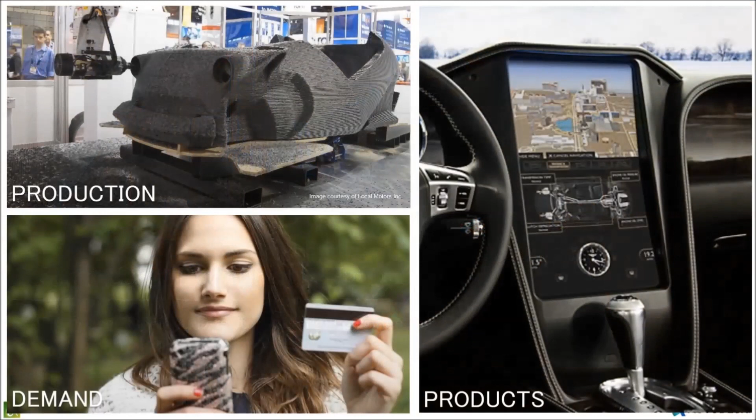With world-leading research and development around the globe, today we will talk about new production methods, demand, and products.

The world is changing, and production is changing. I am now getting older, and I have seen some of this change. Using additive manufacture for making automobiles, to me, is fantastic.

I also have three teenage children, and I can see the way they demand products. They want things immediately with their phones, purchasing within seconds, not minutes, not hours.

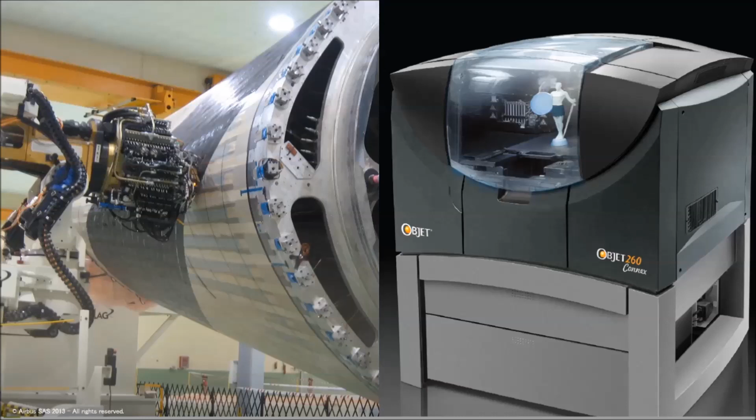Manufacturing is changing. Here we can see the fuselage of an Airbus being manufactured from continuous carbon fiber. This type of manufacture is totally transforming the way we make parts, making them lighter and stronger.

3D printing is becoming part of everyday life, where you can design a part and have it in your hands within a few hours. So the world is changing.

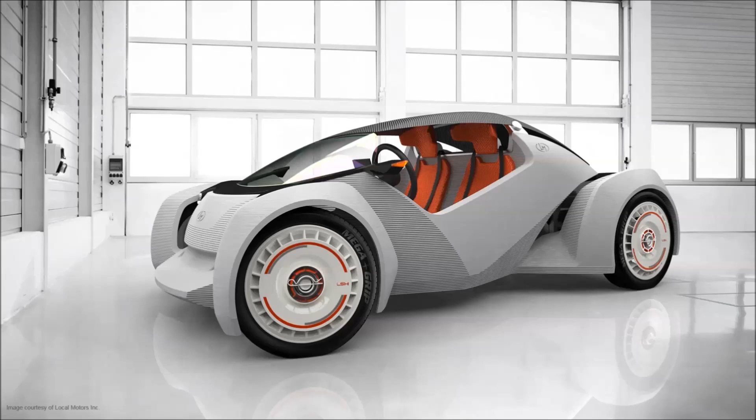For example, this is the world's first 3D printed vehicle. This was designed by people all around the world.

It can be customized for the individual and manufactured locally. The idea of car dealerships having to keep many parts in stock will soon change — you'll be able to manufacture the part for your vehicle locally.

One important aspect is the material used. The material may depend on your local geography — maybe you're in a very hot or very cold climate. So the material can be specialized for your environment. Presently, automotive manufacturers have to make vehicles that work in places like the Antarctic and also very hot places like the Bahamas.

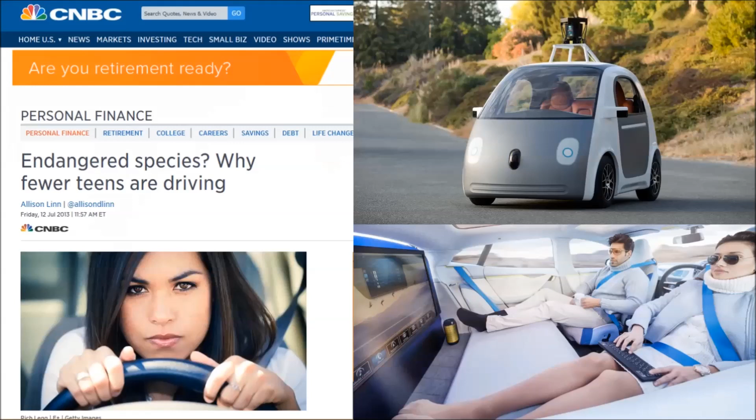Here's an interesting concept — we all have our driving licenses, but we may soon be the last generation to have them.

Like when we go on the Shinkansen, we have a coffee, sleep and relax — local transport in automobiles will go this way too. You'll be in your automobile and maybe go to sleep, and it will be a far safer future.

Thankfully we have technology. It is here, it is evolving, and it is part of our everyday life.

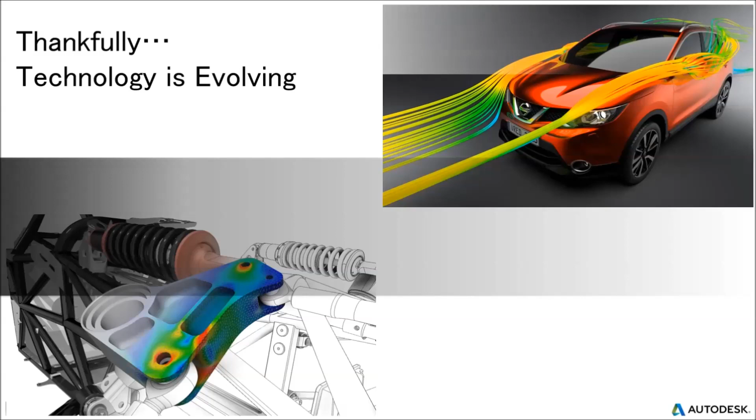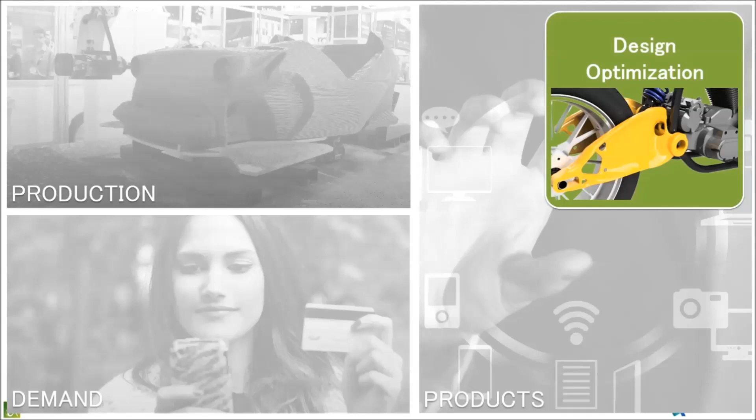This is how we will transform simulation for the future. So we will talk about production, demand, and products — one very exciting part of simulation is design optimization.

This afternoon my colleague Kanji-san will present this in more detail. I guarantee this will astound you in terms of technology.

Advanced materials and manufacturing — composite materials can now give far superior properties than metals. This is something my father would never have believed.

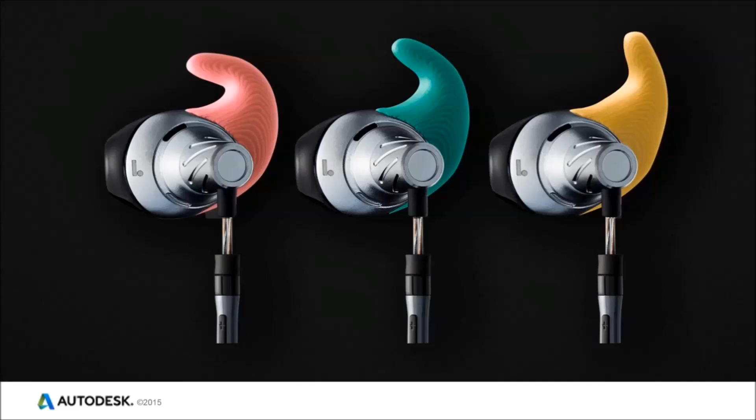And we'll also talk about smart machines. So, advanced materials and manufacturing — the promise is how this will change our future.

This is a fantastic example of how design, technology and demand all combine together. Everybody has earplugs, and whenever you're running, they always fall out. So now, with your mobile phone, you can take photos of your ears.

Within a few days, you can have custom earplugs made for your ears. And this will also stop my children from taking my earplugs.

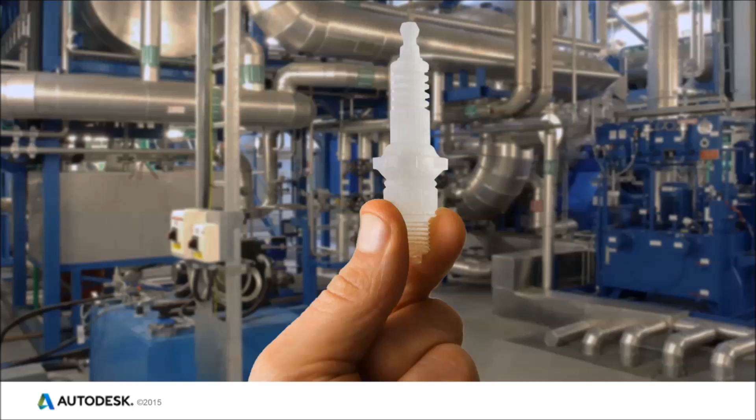Technology is changing traditional manufacturing processes. Think of devices like spark plugs for engines - we can now manufacture these in different ways. 3D printing used to be seen as just for small components, but now it's used in industry every day.

I really love this slide because it shows how engineering is becoming closer to nature. My father was a design engineer many years ago, but he designed in very rigid, formal ways.

But think about our bones - they are light and hollow, yet designed perfectly for their function. They are strong and dense where they experience high stress.

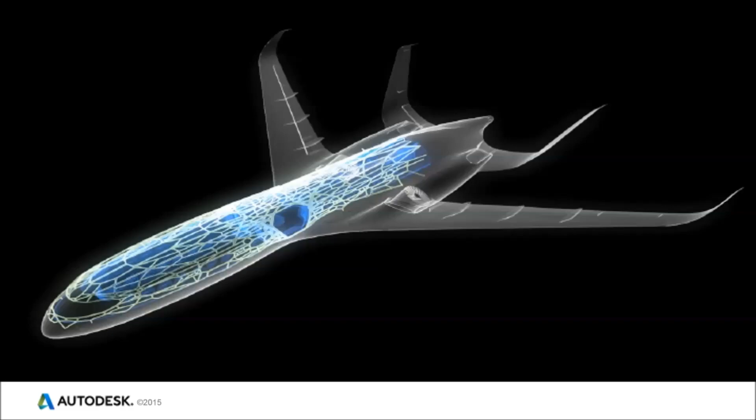With new technology, we can make parts and save weight, so we can make cars more fuel efficient. It's not about how fast your car can go, but how economical it is.

My Japanese car in Australia has the same fuel efficiency as my motorbike when I was a young man. It was also a Japanese motorcycle and I loved it.

If my wife will let me, I'll buy a new one. I fear she will not.

With new processes, we can make designs freer, more durable, and more efficient.

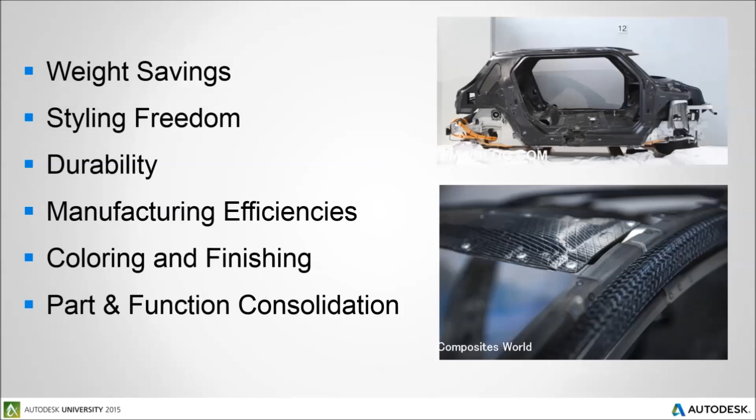So we've talked about the reality of advanced materials and manufacturing.

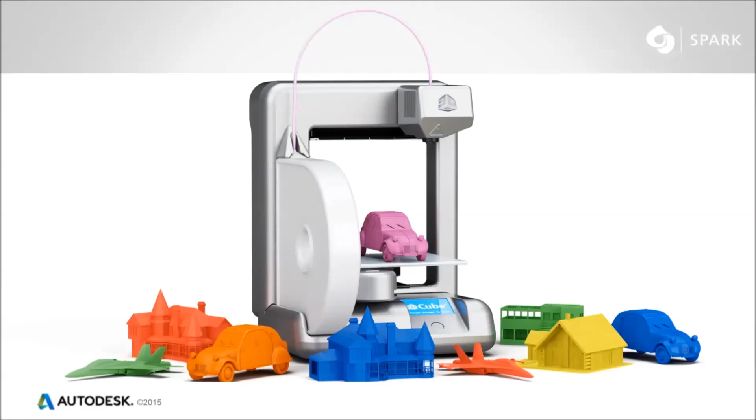This slide looks very simple - 3D printing and all these beautiful components manufactured by additive manufacturing. My children want an additive manufacturing device, a 3D printer for home.

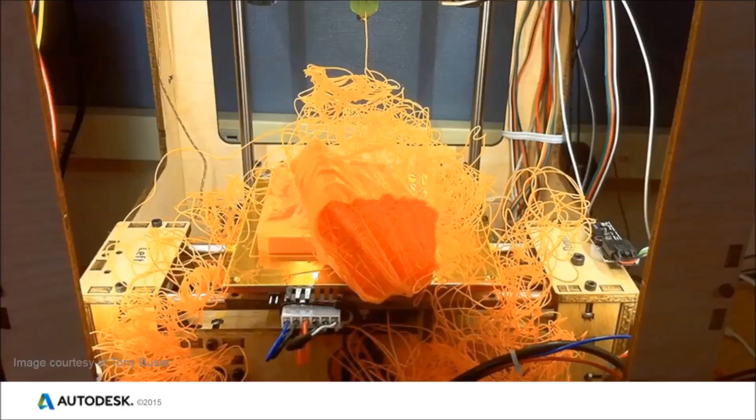But here's the reality - this is spaghetti. 3D printing also needs expertise.

I introduced a MakerBot into our facility in Australia maybe 3 years ago, and we happily made spaghetti for many weeks.

With materials, we can combine the advantage of long fiber composites with traditional injection molding. Think of the carbon fiber used in Formula One combined with injection molding, adding aesthetics and functionality. My father would be very surprised to see this.

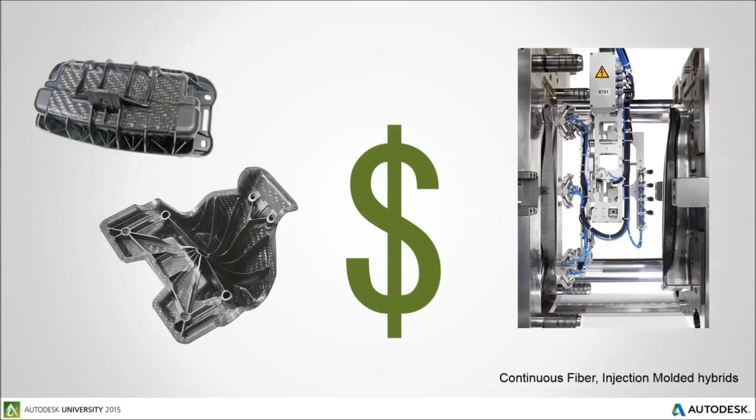So let's talk about how simulation can help in this process. Simulation can optimize the design upfront, and we can explore composite material options digitally.

Autodesk has much technology used in the movie industry, so our simulations can look more real than real. When evaluating product design and how light affects the part, it's unbelievable.

But life is not easy, and over my 20+ years with Moldflow, I've seen how technology has changed. Customers are always wanting tighter tolerances, more and more tolerances.

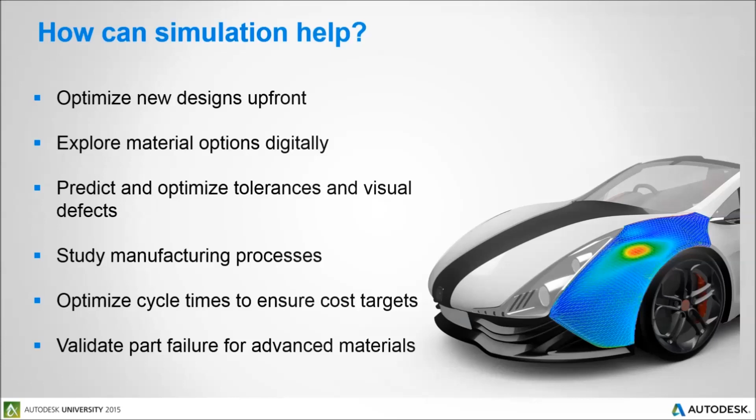So we talked about spaghetti - here's an example of how Autodesk takes spaghetti into something more beautiful, like tempura, Japanese food.

Because you can simulate the 3D printing before you make it, and we now have the tools for this within Autodesk - also algorithms for how to support the components while they're being manufactured.

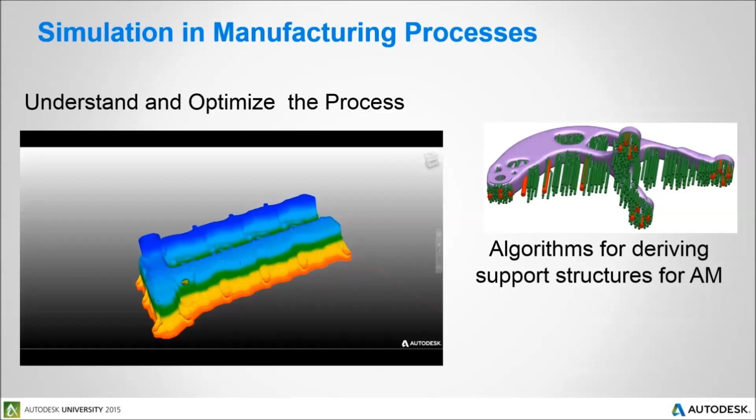Sometimes with additive manufacturing, you can't even see the part because of all the supports, and you wonder where it is. More supports means longer cycle times and more material, and for metal additive manufacturing processes, this can be very expensive.

So, simulation for optimizing performance - we mentioned visualization. Here's an example of a classical Moldflow analysis showing a defect. This is what we accept now, but this is what we also have now - this is totally fantastic. This is a simulation, not a photograph.

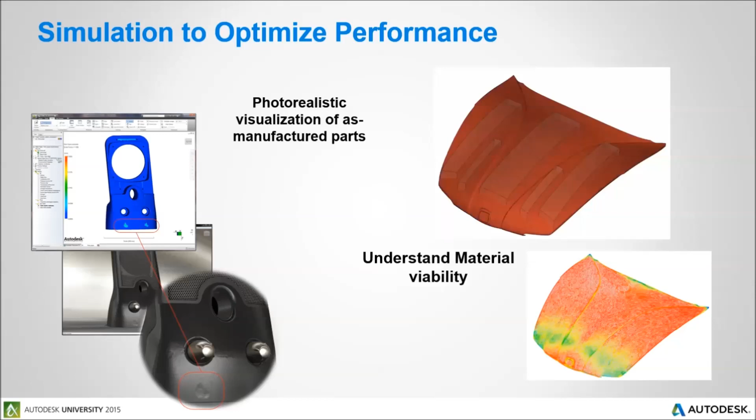Now we'll talk about smart machines and how these will transform and are transforming the world.

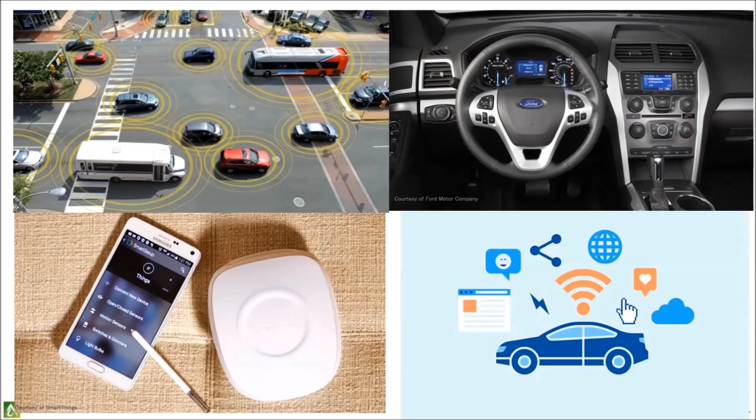The most obvious example is automobiles. And not us talking to each other on a phone, but the vehicles talking to each other and also talking to the manufacturer.

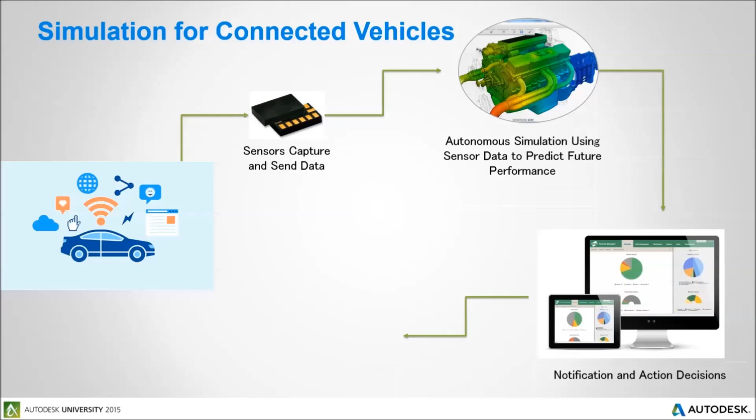Or even better, the vehicle making changes itself to help fix problems, with data going back to the manufacturer and a recommended service.

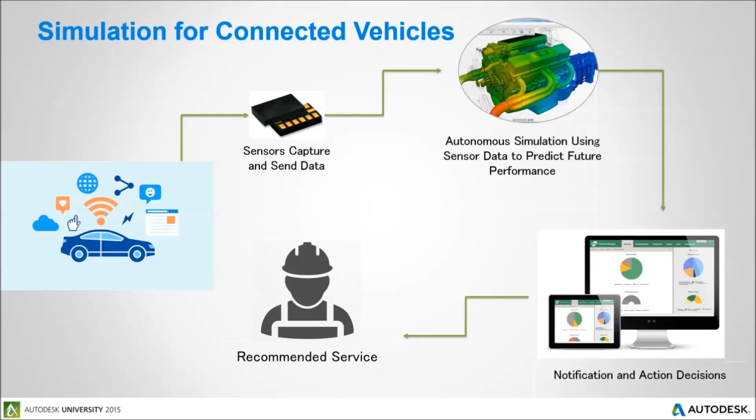So this will transform our lives. And here's a real life example: the Tesla automobile, an electric vehicle connected to the internet.

If there's a recall on a vehicle because of a safety issue, this is inconvenient, it's frustrating, it's annoying, and it could be dangerous. So here is a vehicle which connects to the internet every day.

Every day, Tesla knows how your car is performing, and every day updates can come onto the vehicle for safety. A real example was where the ride height of the vehicle was changed overnight because of a potential safety issue.

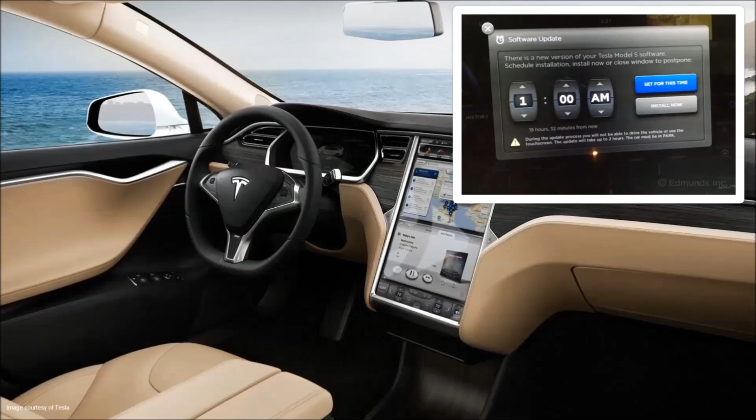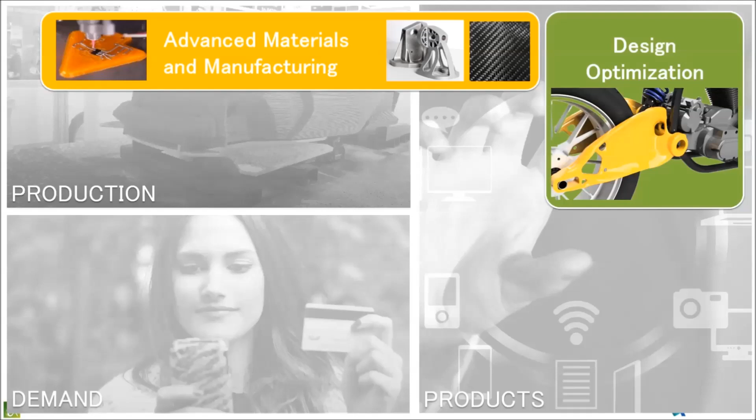So we talked about design optimization, and Kenji-san will talk about this further. We talked about advanced materials, manufacturing, and also smart machines.

These are all areas Autodesk is investing in. I am personally very proud to be part of Autodesk in this change.

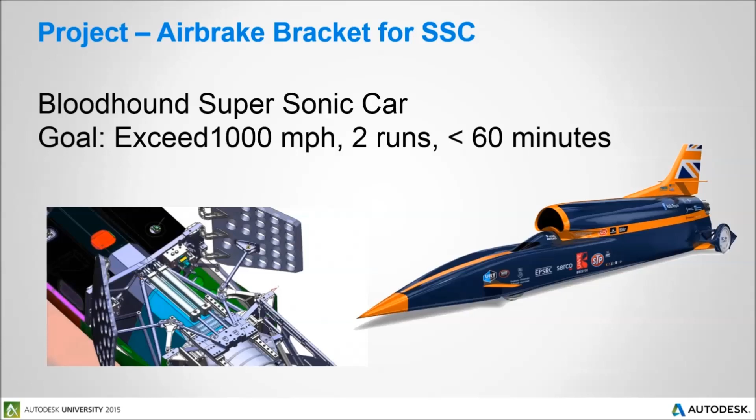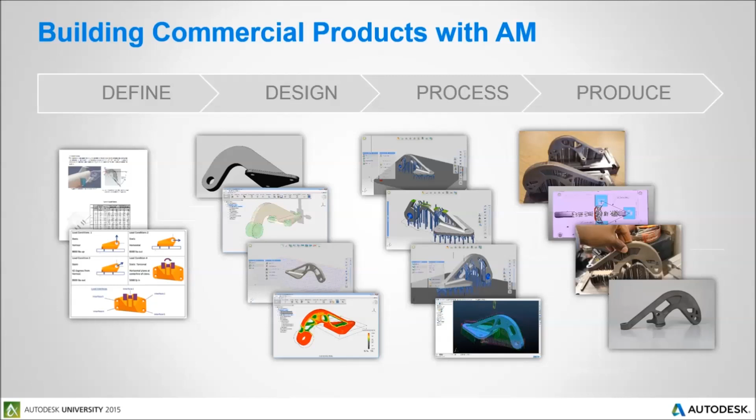So we talked about topology optimization, and you look at this part here. Traditionally, you would make this solid. This type of technology will change the way you design parts.

Where you can define the structural requirements of the part, and you can achieve those structural specifications by using significantly less material. So you make the parts lighter and you use less material. It sounds very simple, but this is what we are doing now.

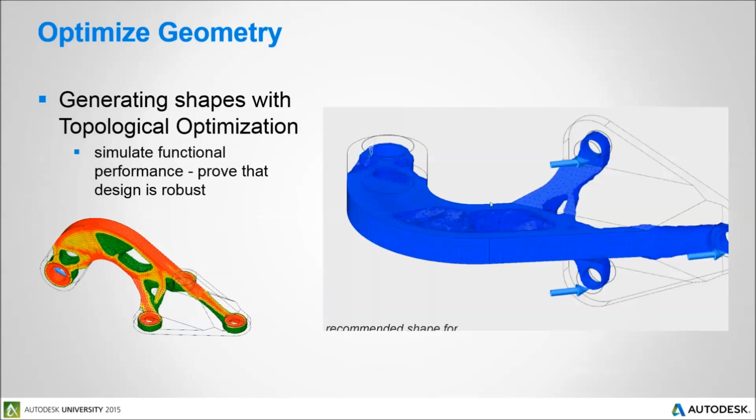For additive manufacturing, to avoid one of the biggest problems, which is meshing and repairing of CAD, Autodesk has tools for you to use to take CAD, maybe non-ideal CAD, and mesh it and repair it in one easy step.

For example, sometimes it can take hours, weeks, and months to load the CAD into these packages so that they can be manufactured, because there are slight gaps and holes and it's not perfect CAD. So we have tools now so that within seconds you can repair and go into the printing process. And for large components, you have to analyze the supports where the highest load is.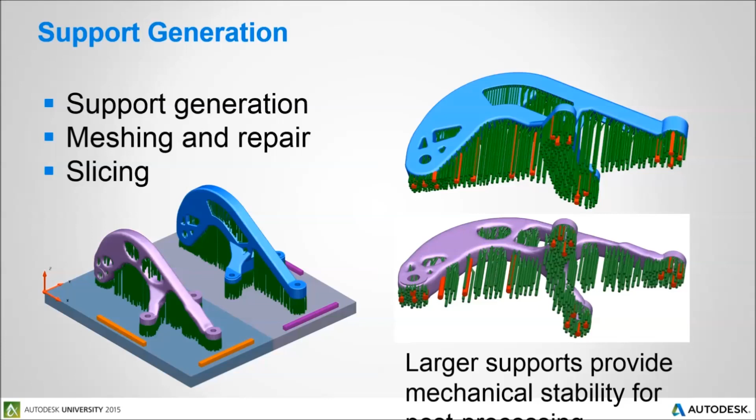Here is an example of an additive manufacturing process. Elapsed time: 15 hours. There are many different types of technologies being used today, so the challenge for Autodesk is to simulate all of them, and you determine the process.

You have to have expertise to know which process is the right process for your part.

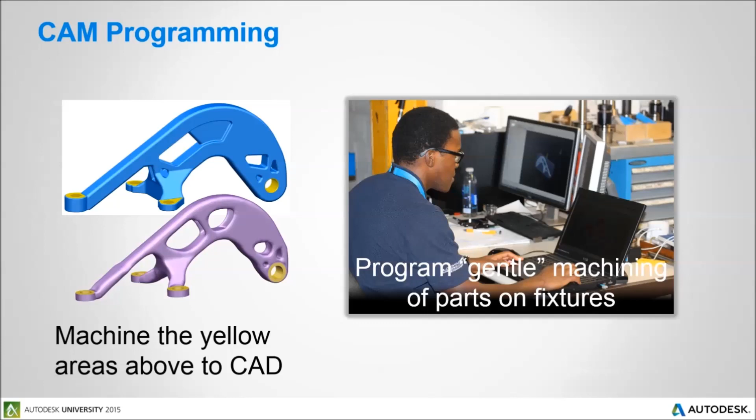And the example on the left shows maybe a traditional part with a part designed through topology optimization, both achieving the same mechanical ability, one using less material. But we also have the tools to take topology optimization and make them look more rigid and make them look more engineering.

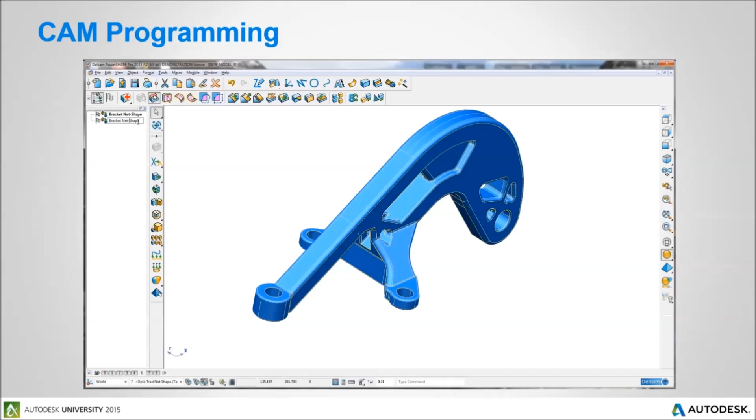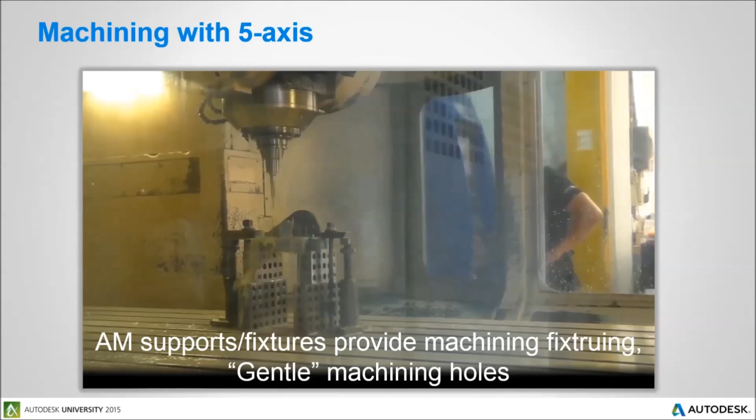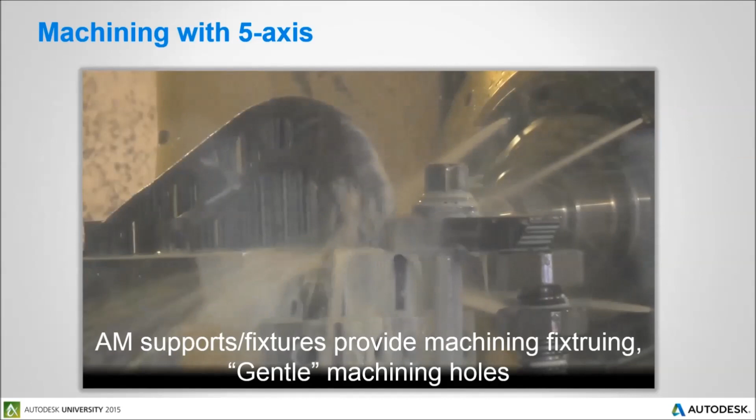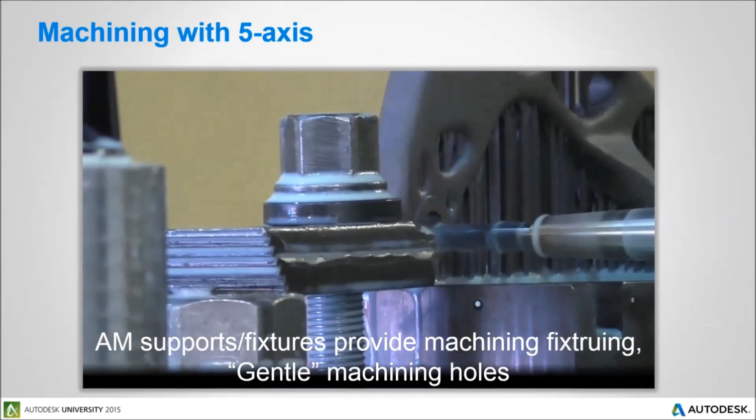Here's a video just explaining this. Where you're defining the yellow are the constraints, and you would be defining how the part is going to be manufactured. And here is an example of additive manufacturing showing the process with the machining afterwards. So you're combining the new techniques of additive manufacture with the old techniques of machining where you need to have specific tolerances for bearings.

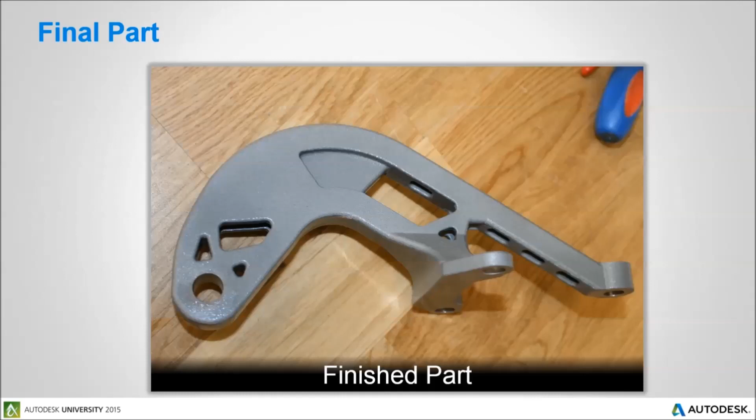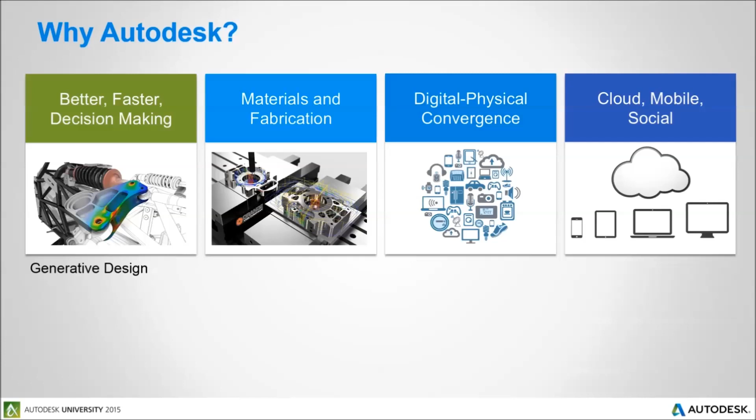And here is the finished article. So why Autodesk? So you can make better, faster decisions, information about the material, fabrication, digital and physical convergence, and the use of cloud. So we have generative design, which Kenji-san will talk about this afternoon. Additive composites, the Internet of Things, and our move to the cloud.

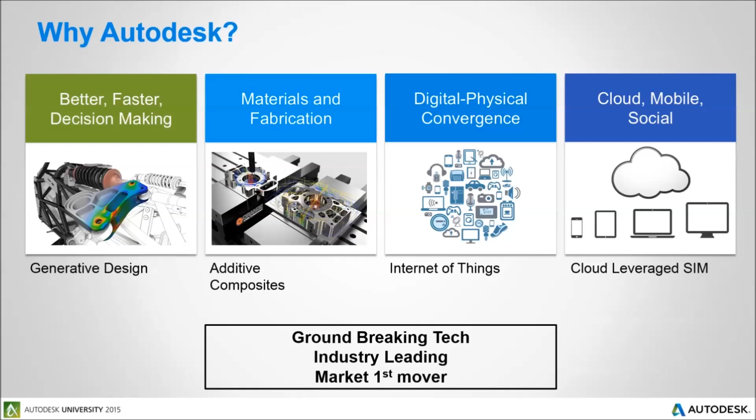So groundbreaking technology, and we are the industry leading market number one. So now we're going to have an overview of the simulation within Autodesk. And again, this is changing very quickly. When I visit Japan, it's always fantastic to show people the latest technology. So within my team, we have many new technologies.

I remember Firehole coming, and then NEI, Nastran, and then Terascale. So now within our simulation team, our mechanical analysis is powered by Nastran. And Nastran is a well-respected brand within the industry. And our latest acquisition, Terascale, is for explicit solvers. Kenji-san will give some examples of this. It is typically when something is dropped and breaks, or when vehicles crash.

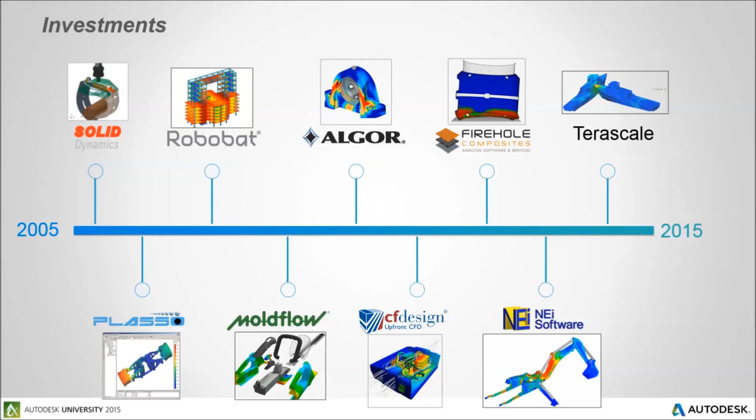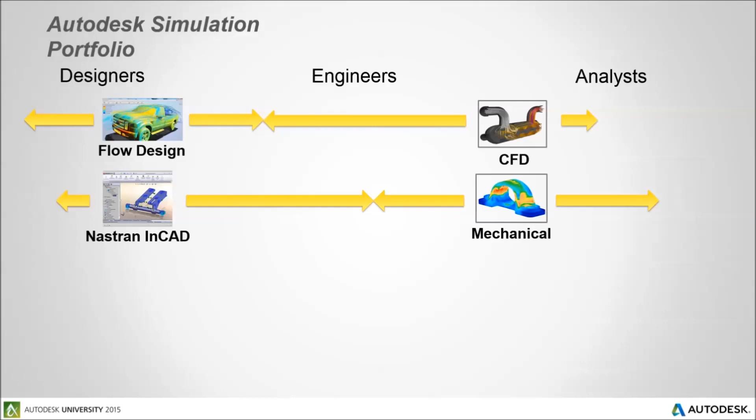So with mechanical analysis, we have Nastran InCAD. So you have a full mechanical analysis capability in Inventor. And we also have the full product for mechanical analysis. And the same way for Moldflow, we have design for manufacture and the full Moldflow analysis.

And also for composites, we have our composite design product, which allows you to look at different layers of materials and how they will behave. And we also have our full composite analysis, which is used for manufacturers making parts from continuous fibers.

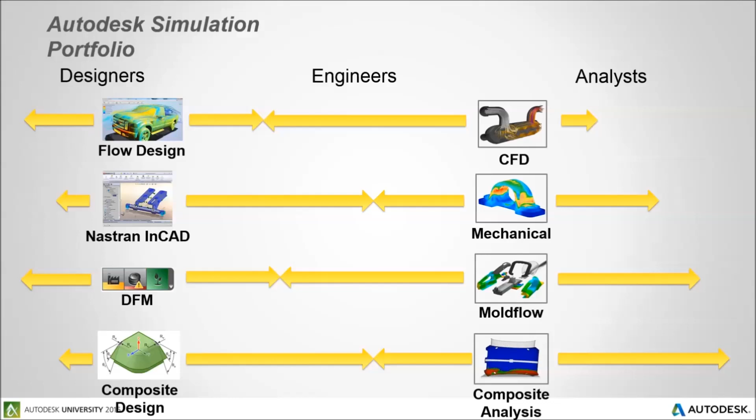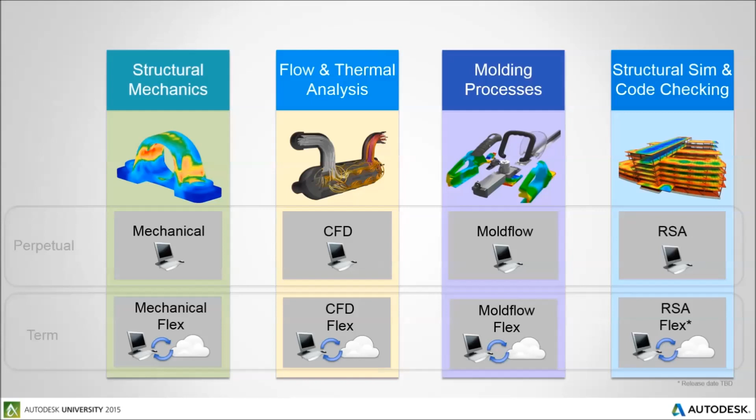So all our products for the structural, thermal, and molding have the ability to run on the cloud. This is transforming the way we carry out optimization. So with Moldflow, we can carry out optimization design to get the best design.

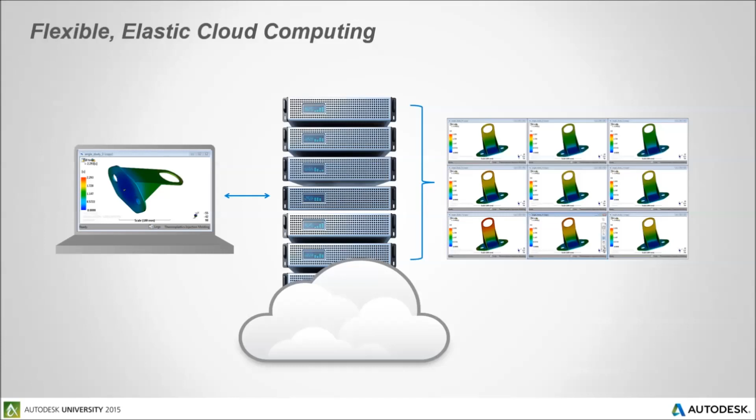But traditionally, this would take maybe 1 year if you just had one computer. And if you were lucky enough that your boss approved a room full of computers, you could maybe do it in 1 month. But now with infinite computing, you can run many design optimizations in a few hours without having to buy expensive hardware. So the power of the cloud is changing our optimization strategy for real.

So our strategy for simulation is to be open, integrated, purpose-built for the designer, the engineer, or the analyst. So we also talk about optimizing.

Flexible. So I have maybe an optimization running on Moldflow, 1000 analyses, and I can see how it's performing on my smartphone. So when the optimization is finished, I can see the ideal design on here. That's what we mean by flexibility.

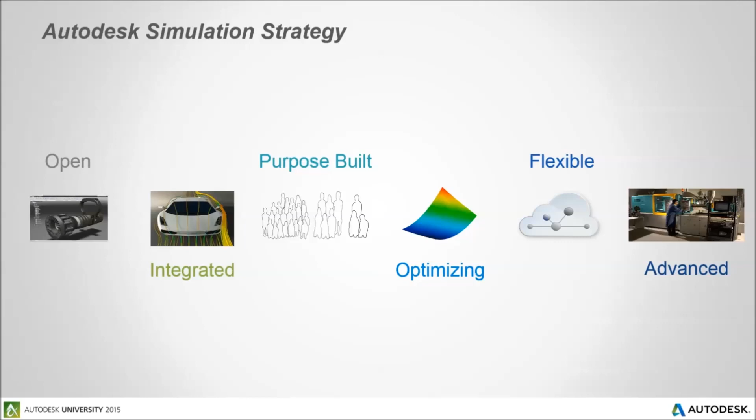So I want to now talk about the strategy for Autodesk Moldflow.

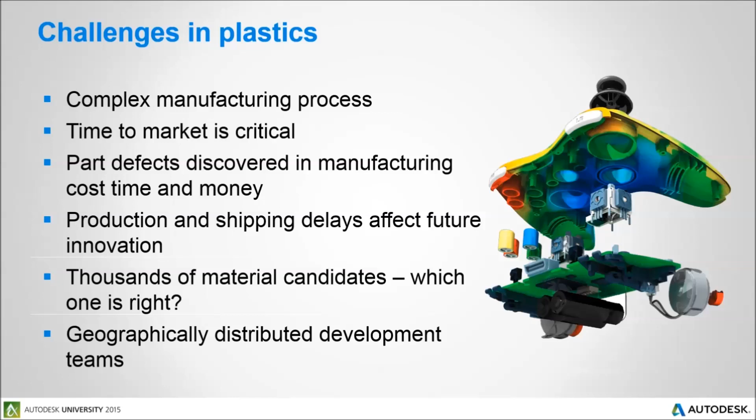So with Autodesk Moldflow, our focus is on design optimization. Get it right first time.

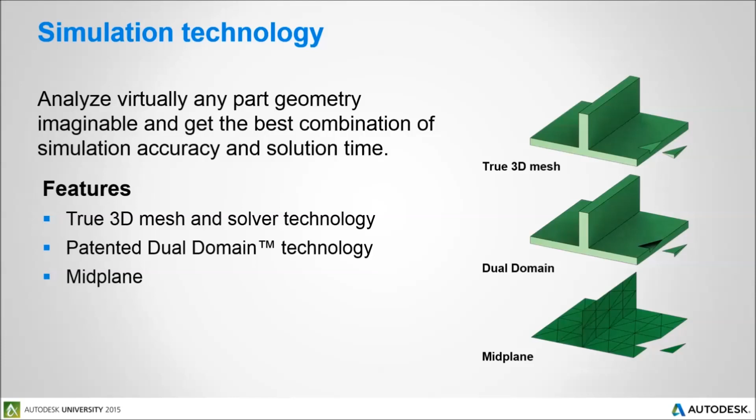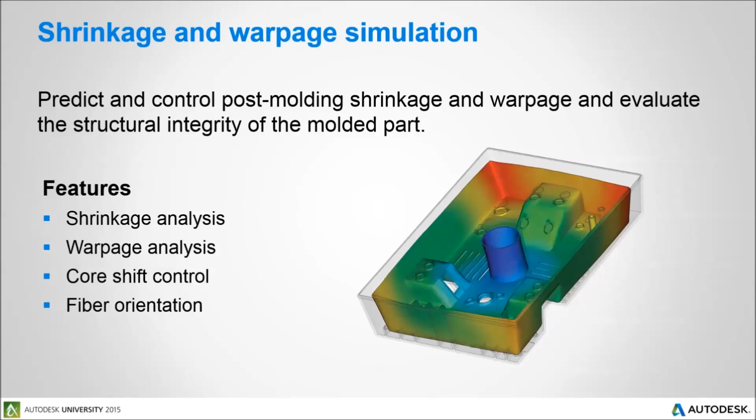So we are investing more people and more effort in this area.

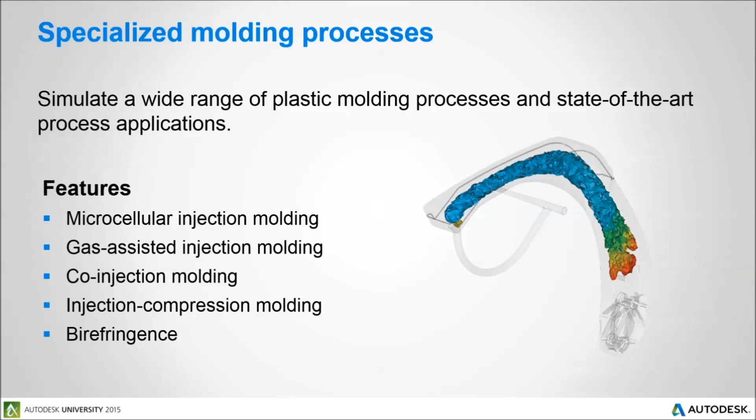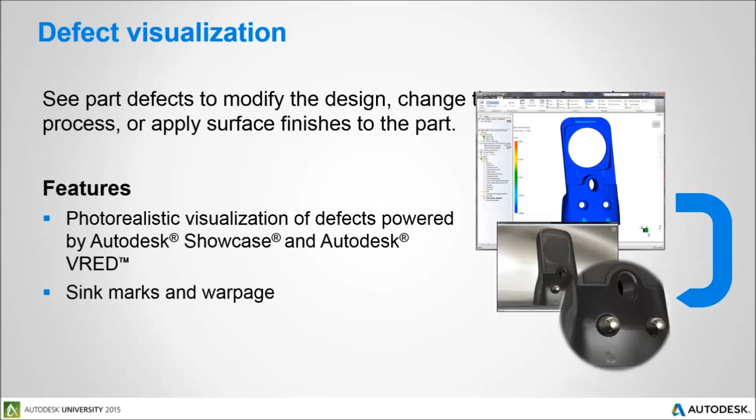So we have a Moldflow Advisor product for the design engineer.